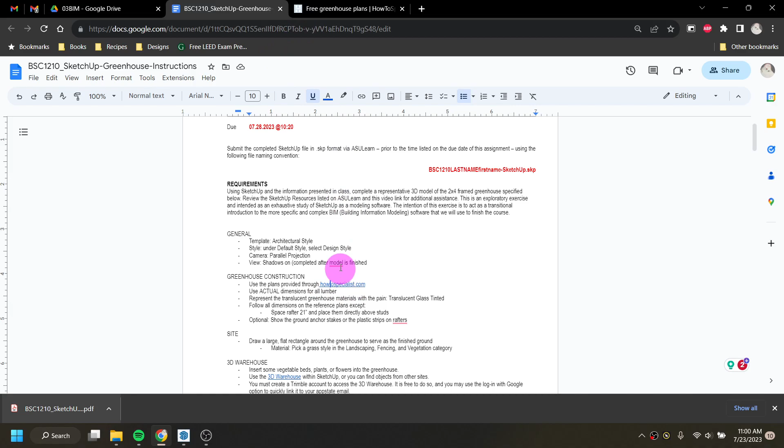Okay, this video is going to go over the SketchUp Greenhouse assignment. Looking at the instructions, we are going to create a greenhouse primarily from the plans that have been provided at howtospecialist.com. Please make sure you click on that link and look at these plans. We are going to tweak them a little bit for our own SketchUp design, but we're going to primarily use what has already been given here.

A little note too is that we are going to use actual sizes instead of nominal sizes. So keep in mind whenever we see something like a 4x4, it's actually going to be 3.5 by 3.5. And when we see a 2x4, it's actually going to be 1.5 by 3.5.

This is basically what our building is going to look like, and there are also some screenshots provided in the instruction file itself for what it's going to look like. We'll start off with building our base here, which is going to be 10 foot by 14 foot. These anchor stakes are going to be optional extra credit, but I will show you how to do them later on in the video.

We aren't going to go into as much detail as what's being shown through all of the joinery details, because in my opinion, SketchUp is much more of a conceptual software to get ideas across, and then we can bring it into AutoCAD or Revit for a lot more of those details.

So when we are in SketchUp, we want to make sure that we are using the architectural template, which is the one that's in feet and inches. Mine's the first in my list because I have it favorited. Yours might not be the first one in there.

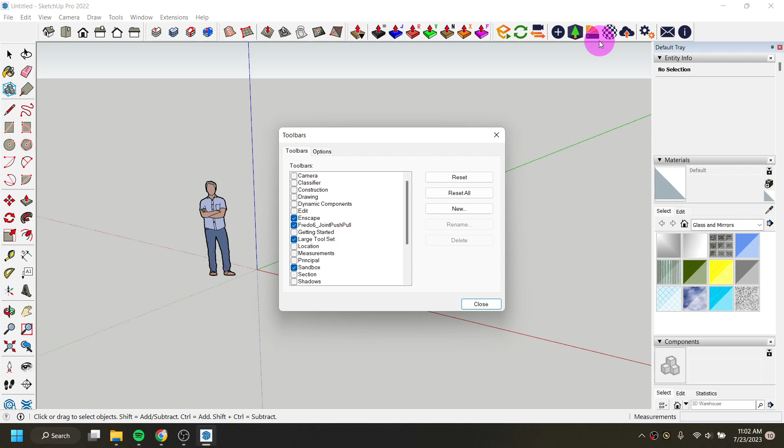Next, what we also want to change is our camera. I'm going to adjust the camera from a perspective style to a parallel projection, which is going to make it a little easier when I switch my views to look at something from the side or from the top, because it gets rid of all of that projection. Then I'm going to delete this guy here because he's just going to get in my way a little bit while I'm drawing.

So I'm just going to click on him and then hit the delete key on my keyboard to erase him.

As a little bit of a review from class, to move around in SketchUp, you can use your scroll wheel to zoom in and out. If you click it like a button, it will turn into the orbit tool and you can move around three-dimensionally. Then if you hold shift and scroll wheel down, you can pan the drawing around to move. So it's the opposite of Revit and the opposite of AutoCAD when it comes to those controls.

So the first thing I'm going to do in order to draw my object is just draw a rectangle for that 10 foot by 14 foot base. When we start typing in measurements, they are just going to feed into here automatically, so we will be able to see them. It's always a good idea too to start your drawing based off of this origin point, so that way we know if we're drawing something straight up, flat on our depth axis, our width axis, or our height axis.

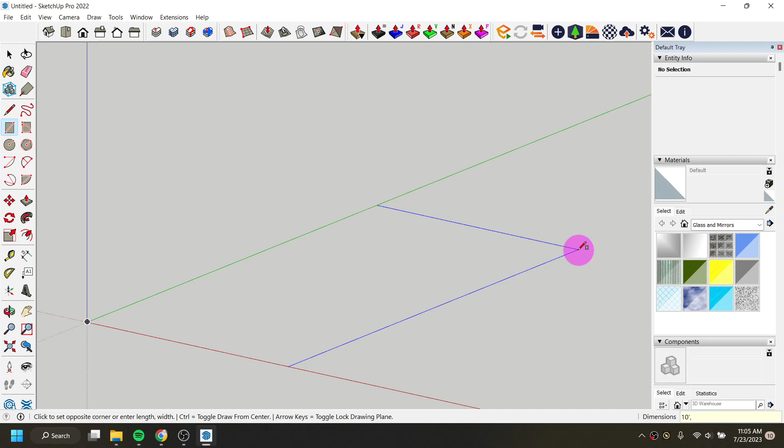So I'm going to draw a rectangle, which is keyboard shortcut R, or this button here in our tool set. I'm just going to start it on that origin point, and pull in a direction, making sure the rectangle stays blue when I pull it. Then I'm going to type in my distance, which is going to be 10 foot, comma, 14 foot, enter. And that will make my 10 foot by 14 foot rectangle.

What I'm going to do next then is pull this in for the measurement of the 4x4 that is making up this base.

I'm going to use the offset tool for that. So I'll hit space to go back into my selection tool, then offset is either keyboard shortcut F or this button right here. I'm just going to click on this rectangle, bring my cursor in, and type in my amount.

When I type it, I can do 3.5, or I could do 3 space 1/2. I don't have to put that quotation mark there for the inches. What I can't do is a 3-1/2, because it's actually reading that as 3 minus a half. I usually do decimals, so I'm just going to do 3.5, enter.

That has brought that in 3.5. I'll hit space to exit the tool. I'm just going to pan over by holding shift and scrolling my scroll wheel. I'm going to take this inner rectangle and delete it because I don't need that anymore.

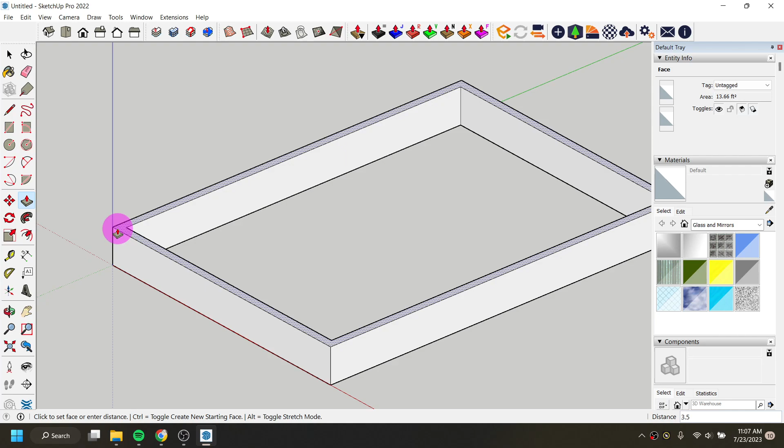My next step is to push-pull this base up. I'll use my push-pull tool, keyboard shortcut P, or this button here. I'm just going to click on that base face and bring it up 3.5. It's similar to AutoCAD: we click on what we want, move our cursor in the direction we want to go, type the distance we want, and then enter.

So I've made that base part. Now before I start putting in my studs and things like that, I'm actually going to group this into one solid piece, so it doesn't get changed or altered as I build other features on it. I'll hit the space bar to end the push-pull tool.

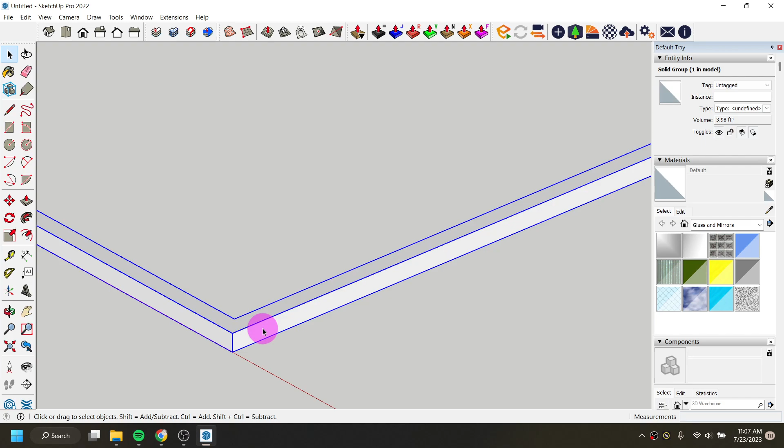I'm just going to click off to the side and do a big window selection of my whole piece, clicking and dragging - you have to drag it, you can't just release. Then I'll right click on the object and say to make this into a group. Now it no longer has any of those dotted surfaces on any of the faces, because those are no longer faces - they are part of this group, and the same with those edges.

If I wanted to edit any part of it, I just double click on it, and then I'll be allowed to edit things like edges and faces and move it around. Then I'd just double click off of it to stop editing it. I super recommend grouping everything as you make each solid piece, so you don't accidentally move or mess things up in the future.

Next we will just paint this into a different color. I find painting things as I work a helpful technique to understand what is one piece versus what is another. To use the paint bucket tool, it's keyboard shortcut B or this button right here.

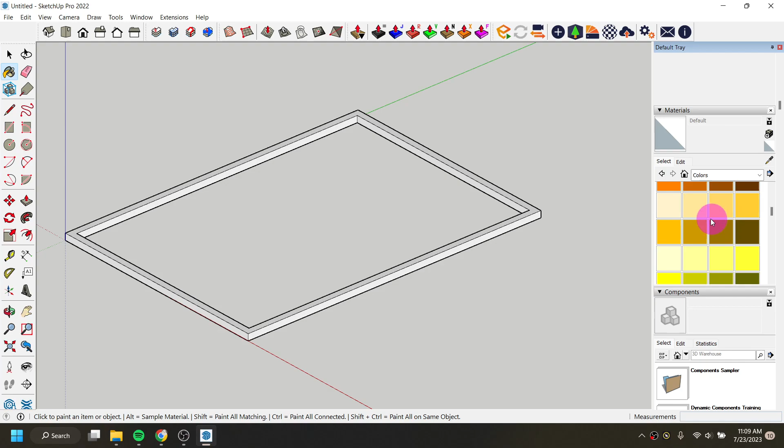When you go into paint bucket, your tray should pop up with your different materials. I'm currently in the glass material category because that was the last one I used when I last opened SketchUp. But I'm just going to go into the colors and pick a darker shade of brown for this, and a lighter shade of brown for my framing. I'm not going to be too specific - I'll pick this one, and then I just need to click on the object I want to color.

Because this is all one group, every piece of it colors automatically, which is great - that's what I want in this scenario. If I wanted individual faces colored, I'd have to hit space to get out of this tool, double click on it to get that highlighted box, then go back into the paint bucket tool with keyboard shortcut B. I could pick a color and color individual faces instead of the whole group at once. Not what I want to do here, but I just want to show you that it can potentially be done.

So I'll hit the space bar to get out of this tool, and I'll just double click off of the object to get out of it. So we have our base here. Again, we're going to ignore a little bit of these joins or joints going on here, and then we can get working on our walls.

One thing of note is that in these instructions, they have the rafters spaced 22.25 inches, but I found that 21 inches worked better to evenly space all of these around. So just keep that in mind as we work through it.

But we're just going to start with a wall that is 14 feet long and 6 foot tall. And that 6 foot is going from the stud only.

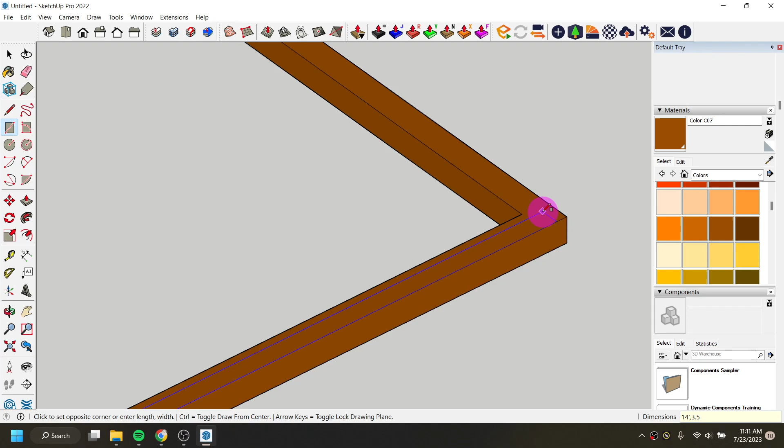So I'm going to go into the rectangle tool, which again is keyboard shortcut R, or this button here. I'm just going to start from this point. I'm going to zoom in, making sure that my rectangle stays blue, because that means I am flat on this face. And I'm going to make my length 14 feet, comma, 3.5. I don't need to put the inches, it's going to assume inches unless I say something else.

It's clipping a little bit into that base part because they are technically sharing the same spot. So then my next step is I'm going to push-pull this up 1.5. That's keyboard shortcut P, or this button here. I'm going to click on this face and pull it up 1.5, enter.

Now, before I start spacing out studs on here, I'm going to want to group it. So I'm going to hit the space bar, orbit myself around a little bit to get the best vantage point to select only this piece. I'm going to hold the scroll wheel to orbit.

And then I'm just going to draw a box kind of this size here. I don't want to go too large because I don't want to select any of this. And I also don't want to go right to left because this is going to give me a cross selection, which will select this. So I'm just drawing kind of a skinny box around here to only get that part.

Right click, make it into a group. I always want to group things as I'm working so that I don't accidentally edit them later on down the line if I don't intend to. And if I do intend to, I can always just double click on it.

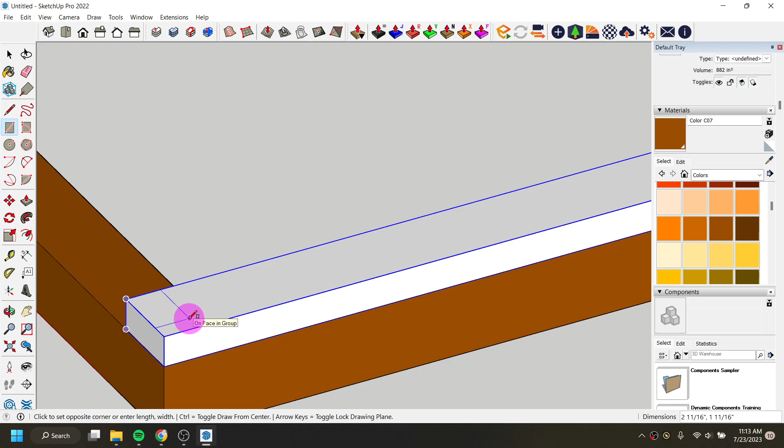So next, I'll start putting in my studs. I'm going to draw a new rectangle, which is keyboard shortcut R, or this button here. I'm going to keep it flat on this face, so again I want to make sure that I'm keeping that rectangle the color blue. And I want to make it 3.5, comma, 1.5, enter.

So this is going to be one of my 2x4s. I'm going to use the push-pull tool, keyboard shortcut P, or this button here. I'm going to pull this rectangle up, moving my cursor up, and then I'm going to type 6 foot, enter.

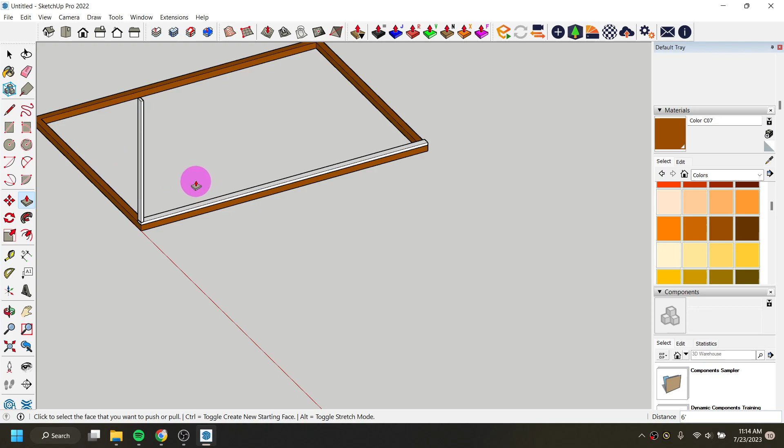And if you have been paying attention trying to guess what I'm going to say next, the next thing I'm going to do is group that. So I'm going to pan myself over, hold shift and the scroll wheel a little bit, and orbit myself to a vantage point where it will be easy to select just that piece.

I'm going to hit the space bar to get into the select tool, and I'm just going to draw a tiny box right over that stud. Then I'm going to right click, make it into a group, so that it will be a little bit easier to copy and paste along as I go.

So what I did before I placed any of my studs along this wall was I kind of spaced out some guides in order to do that, so I could make sure I'm going to have some even stud spacing happening here. Because this is a fairly small structure operating as a greenhouse, we can have our spacing a little bit wider. So I used my guide tool to help make sure everything was going to work out on this building.

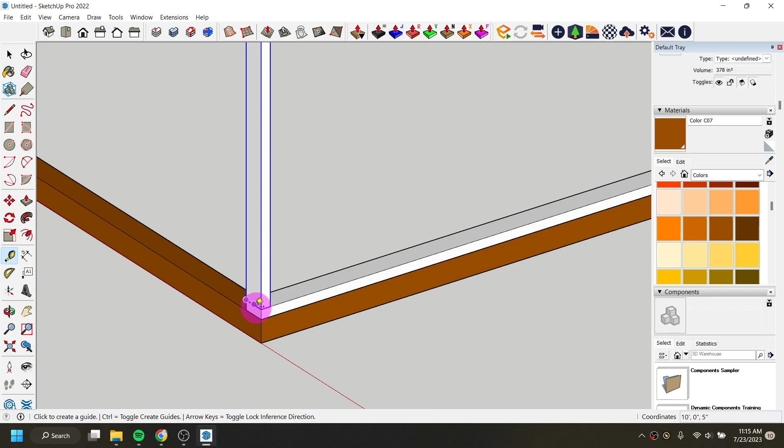So I used the tape measure tool, which is right here, or keyboard shortcut T, and I'm just going to draw a guide from this side. Let me space out and show again: I go into T, click on that edge, move my cursor towards the right, making sure that arrow coming off the guide is staying green. Then I do 21 inches, enter. This tells me where I can put the center of my next stud, so I go edge to middle.

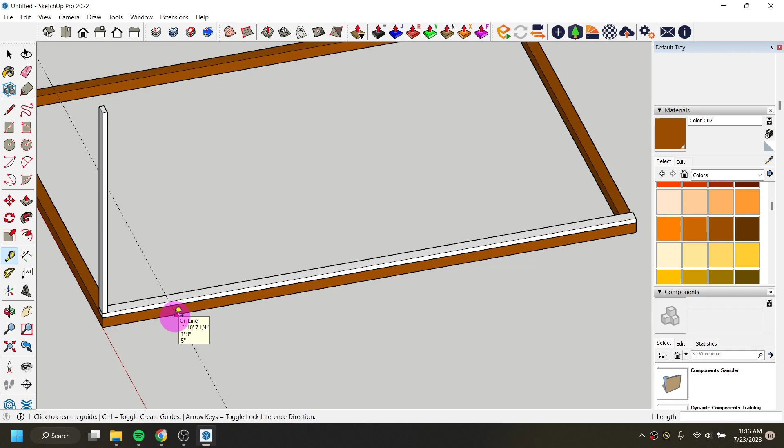I'm going to hold the shift key and scroll wheel down so I can pan over. Then from this guide, I click on this one over, making sure I'm getting that green line. Another 21. Click on this one, make sure I'm getting that green line. 21, enter. Always making sure whenever I'm using guides that it's staying a color.

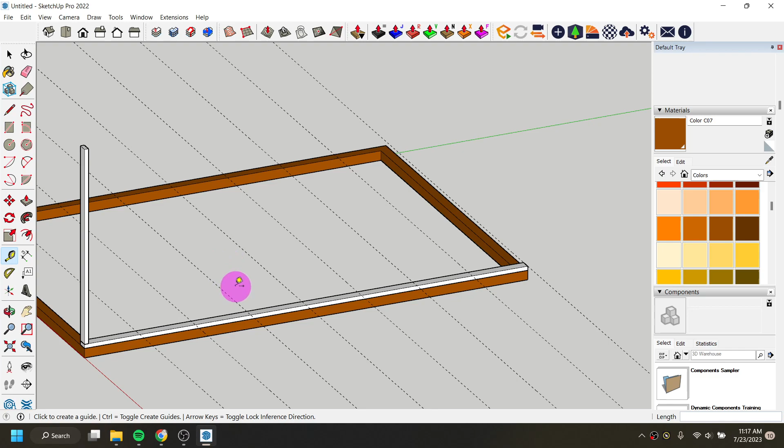So now that I have these as references for where to copy my different studs into, I'm going to hit the space bar to get out of the tape measure tool. I'm going to click on this stud group that I made and use my keyboard shortcuts to copy and paste it—Control C to copy after selecting it, then Control V to paste.

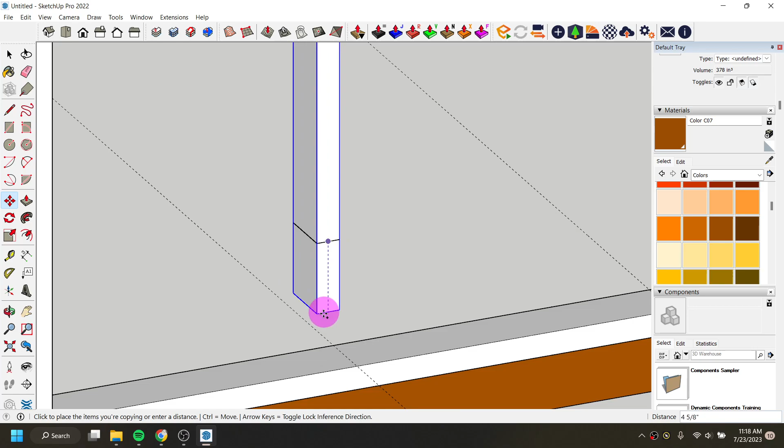I'm just going to put it somewhere, not trying to place it right on the money, just for now. When you copy and paste, it puts you automatically into the move tool, and this is where I can grab it by the middle of that stud and put it on the middle of where that guide sits. So I can paste again—since I've already copied this, I can just do Control V to paste, place it somewhere, then grab it by the point I want and put it on the point I want.

So I can keep just pasting them too. I've got another one—it looks like I might have pasted twice. I'm just going to grab it by, whoops, I'll hit the space bar, click on this one, go into Move, keyboard shortcut M, grab it by the middle of the group and place it onto that intersection.

And I'm just going to keep copying and pasting it all the way down. Control V to paste, place it here, grab it by that middle, put it on that point. Control V to paste, place it somewhere for the time being, grab it by that middle, put it on that point. Control V to paste, place it somewhere, grab it by that middle, place it onto that point. Control V to paste—hopefully you're getting the gist.

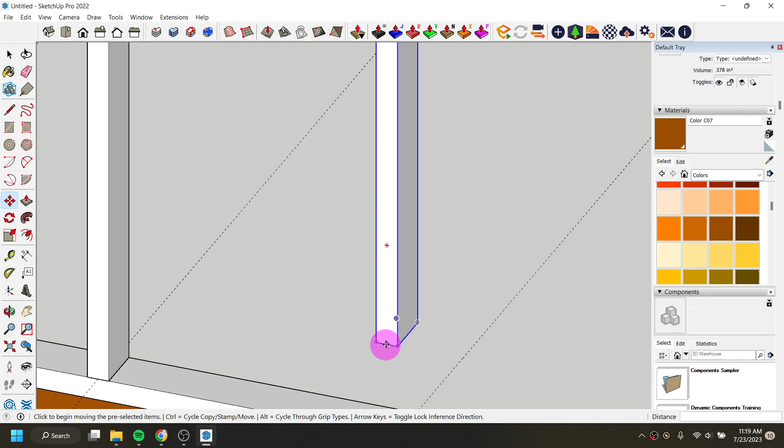And then this one, Control V to paste, place it. I'm going to grab it by this corner and put it on that point. And so now I have those studs placed evenly across this wall.

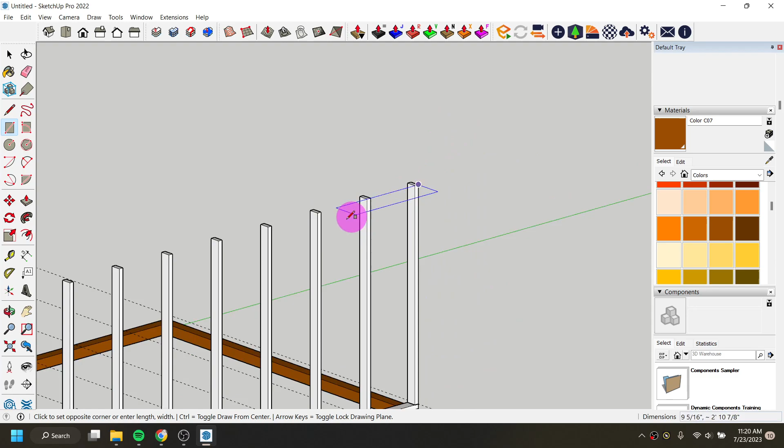My next step would be to make my top plate, which I could do in one of two ways. One would be, if I hit the space bar to exit this command, I could draw a rectangle using keyboard shortcut R, and draw one all the way across here. I'm going to hold Shift and the scroll wheel, making sure it's staying blue, and draw that across. Then P for push pull, grab this, bring it up 1.5, enter, space bar to end the tool.

And then group this into one piece. So again I've got to orbit myself around, holding the scroll wheel down like a button, so I can get some type of vantage point where I can grab just this guy. That's where I also need to make sure I'm going left to right. Right click, make it into a group.

Or what I could have also done, I'm going to click on this object and delete it. I could have taken this bottom plate that I already made, Control C to copy, Control V to paste, place it somewhere for the time being, and then grab it by a corner to put it onto that corner, because the bottom plate and the top plate in this scenario are exactly the same.

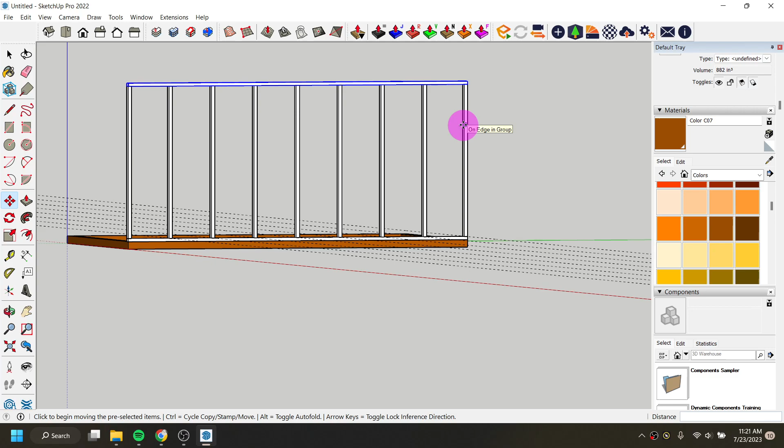Before I make this next wall, because this wall over here is going to be exactly the same, I'm actually going to take all of these separate groups and group them together into their own group to make it easy to copy that whole thing across.

I'm going to look at my object from one of the side views, right or left, to make it easier to face it head on. I'll hit the space bar to go into my select tool, and drag to only get my wall here, which I did. I'll orbit it around to check that, and then right click and say make a group. So I now have a group of all of my separate groups.

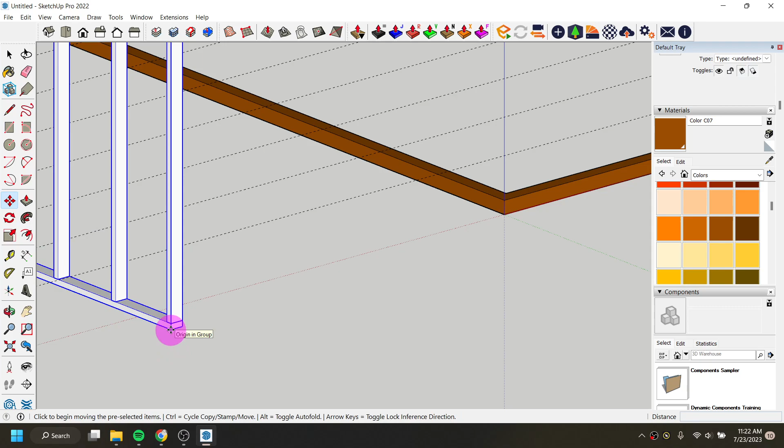I can take this, Control C to copy, Control V to paste, and place it somewhere for the time being. I'm going to hold my scroll wheel to orbit around, and while in the move tool, which copy paste tends to put you into automatically, I'm just going to grab it by this point and put it on that point. So now I just have 2 copies of this.

If I wanted to paint it, since it's all grouped, it'll be really easy. You don't actually have to go into the bucket tool to start painting. If I just click on a color, it'll put me in the paint tool automatically. Because all of these are grouped, I can paint them really, really fast. I'll hit the space bar to get out of the paint bucket tool.

My next recommendation would be to get rid of these guides. The more guides we have in our drawing, the more confusing things tend to get. They're really helpful while working with them, but once you're done, we want to get rid of them. You could click on each guide and use the delete key, or window around them and hit delete. Or you can go into the edit tab, where there's a delete guides tool that just gets rid of every single guide, each and every one.

Next, we will work on putting in our front pieces, our front and back pieces. They did them in a different color, but I'm going to keep mine in the same color. The only thing we have regarding the spacing of these is that there's going to be a 3-foot wide door in the middle of it.

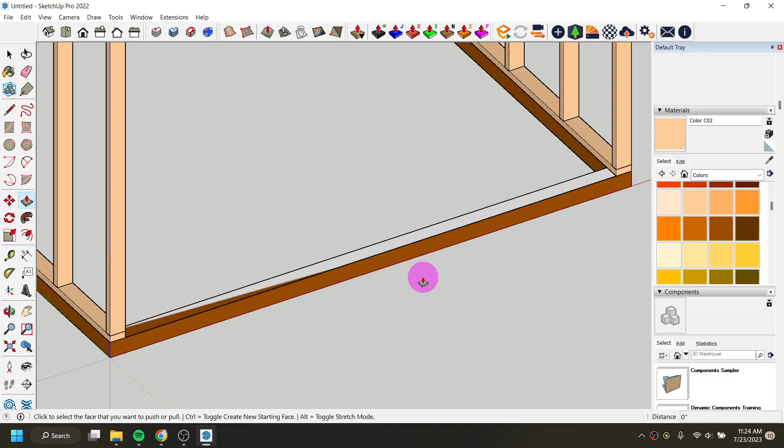Then I'm going to use push-pull, keyboard shortcut P, to bring this up. I could type in 1.5, or bring it up to the same point of this group here, since this is already 1.5, I don't have to take that measurement. And then, you guessed it, I'm going to group this. I'll hit the space bar, highlight a long, skinny rectangle to only get that piece, then right click and make it into a group.

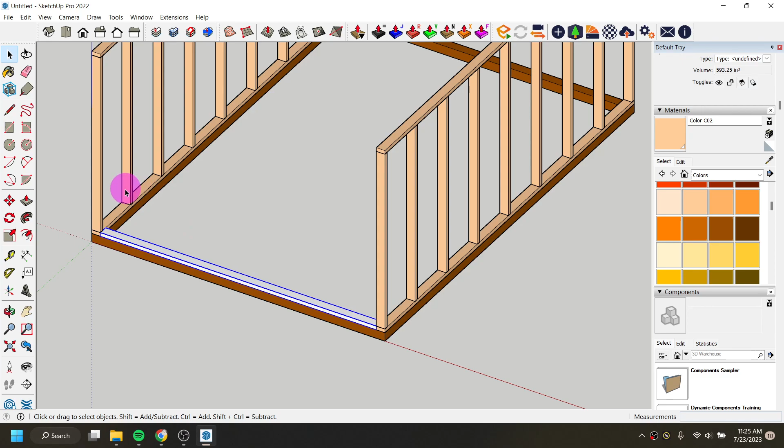I'm going to put a stud in here. I could do it where, but this seems like a little bit of an out of the way way to do this. I could double click on this wall, so now I'm in this group. I could click on this stud, Control C to copy, double click outside of this wall, Control V to paste it. I could then put it down.

I could use the rotate tool, located here—I don't know the keyboard shortcut for rotate, so sorry, it's not R. But I could click on it here, grab it by a point as long as this protractor is blue, go from the red axis, click again to the green axis, click again, and then move this into place.

That seems to me like a little bit of an out of the way of going about making that stud, because the way I would do it is go into the rectangle tool, keyboard shortcut R, from that corner, as long as my square or rectangle is blue. And sometimes I forget which number down here means what, so whenever I forget that, I usually just make a long skinny one.

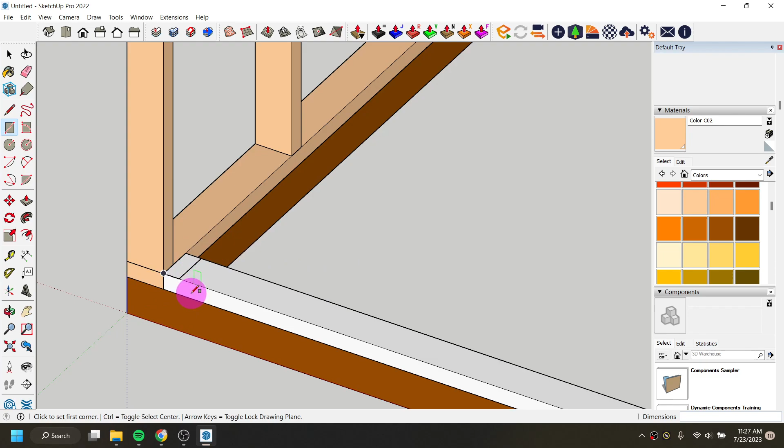When I make that long skinny rectangle, I can read those numbers to say okay, one of those is feet, one of those is inches. Now I know that the first number is my length or width, in this case right to left, and the second number is up and down. So I'll make it 1.5, comma 3.5, enter. Then I'm going to use the push-pull tool, keyboard shortcut P, to bring this up. I could type 6 foot, or I could click on that edge. And then you guessed it, I'm going to group it.

I'm going to orbit myself around, just holding the scroll wheel down, to get a vantage point that makes it easy to just get that piece. I'll hit the space bar to go into the select tool, then draw a click and drag a long skinny window around it to only get that piece. Right click on it and make it a group. You'll know if you accidentally group something else in it, so I'm going to Control Z to undo making it into a group.

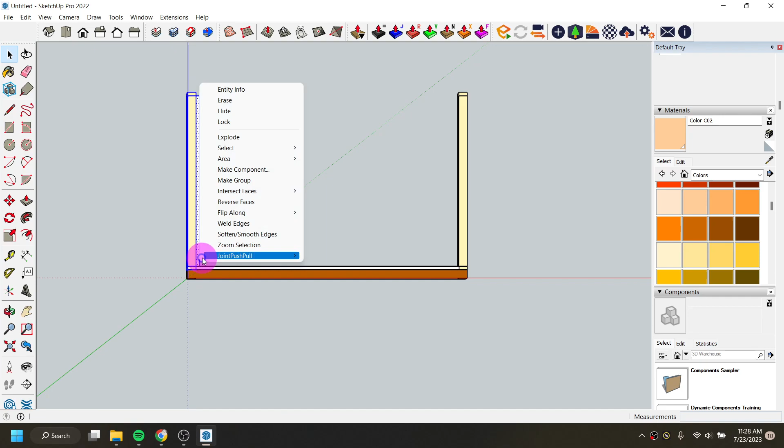If I try and let's say I get that part all in it, if I right click and make this into a group, see how that bounding box around it—when I go to click on here, everything else gets highlighted, or that box is much larger than I intend it to be. That's kind of my way of knowing I grouped something in there that I didn't want to. So I'm going to Control Z to undo that, and I'm going to redo it.

I could also look at it straight from the front to give me an easy vantage point, highlight just that piece, right click, make it a group. Then I'm going to Control C to copy, Control V to paste, place it somewhere, then grab it by a point you know of where you want that point to be.

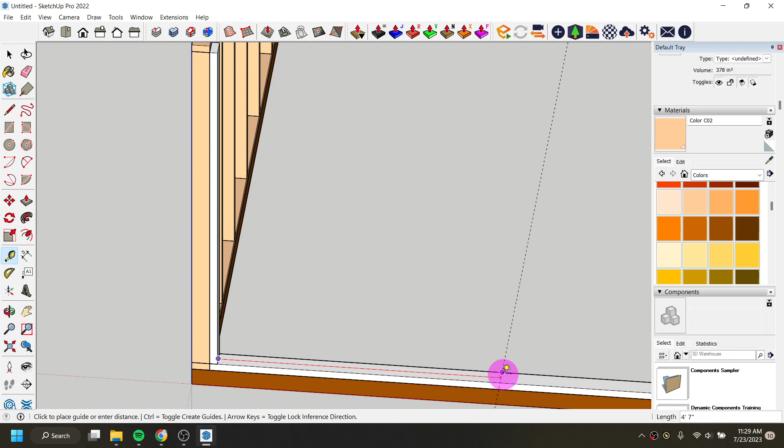I can also work in my opening here. Within my tape measure tool, I'm going to pull a guide over from one of those edges, making sure I'm getting a red arrow when I pull my guide out. I want to pull it until it reaches a midpoint, and it's going to snap when it's on that midpoint. So I'll click to place this guide, and now I know I'm in the middle.

Then I'm going to create a guide out from there—let's go back into tape measure, click on that line, making sure I'm getting that red arrow, knowing that I'm flat. I'm going to go 1.5 feet, or I could also type 1'6", or I could type 18, enter. Then from this way, still making sure I'm getting that red arrow, 1.5 feet. What that is going to do is tell me where the edges of these studs need to be on these sides of where my door is going to go.

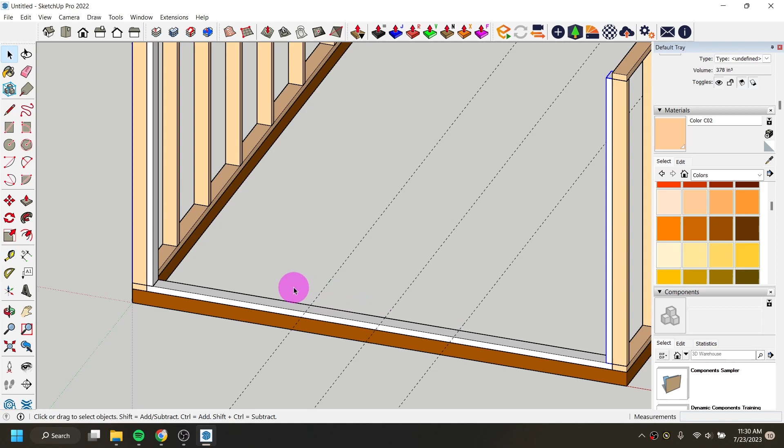I'll hit my space bar to get out of the guide tool. I'll Control V to paste—since the last thing I copied was this stud, I don't have to click on it and Control C again. Click somewhere to place it, then grab it by a point I know.

Of where I want that point to be. So I want that corner sitting there. Control V to paste, place it somewhere for the time being, grab it by a point I know of where I want that point to be.

And then I'll put in my top plate. So I'll hit the space bar. I'm going to just copy this bottom piece. So I'm going to click on it, Control C, Control V, place it somewhere for the time being, grab it by a point I know, and then where do I want that point to sit? Space bar to end the tool.

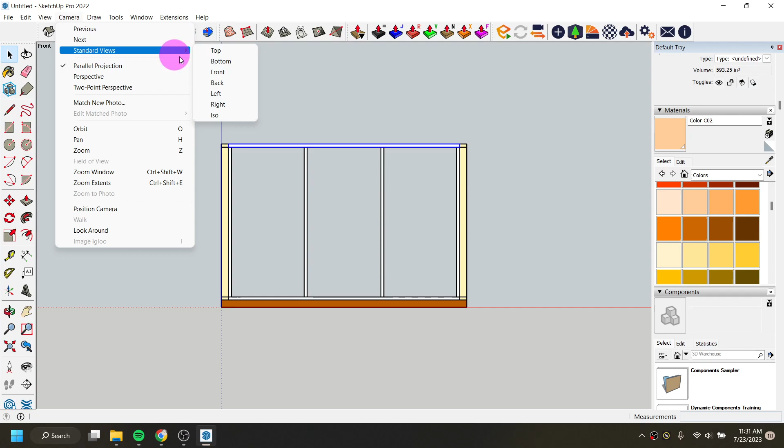And then I'm going to look at it from the front. So I'm just going to grab onto that front view. You can also get to these views without this menu up here. If you go into Camera, Standard Views, we have all of these ones here.

And then I'm going to use the Select tool. So I'll hit the space bar. And I'm just going to draw a pretty tight window around just those groups or just those components. So I'm just going to window around them, right click, make that into a group.

So I could easily Control C, Control V it onto the backside of this building. So I pasted it, just placed it somewhere. Now I'm going to grab it by that corner and put it on this corner.

And I need to paint it too. And I do kind of like painting things as I go. Sometimes I'll wait till the very end to do it. That can be kind of your personal preference.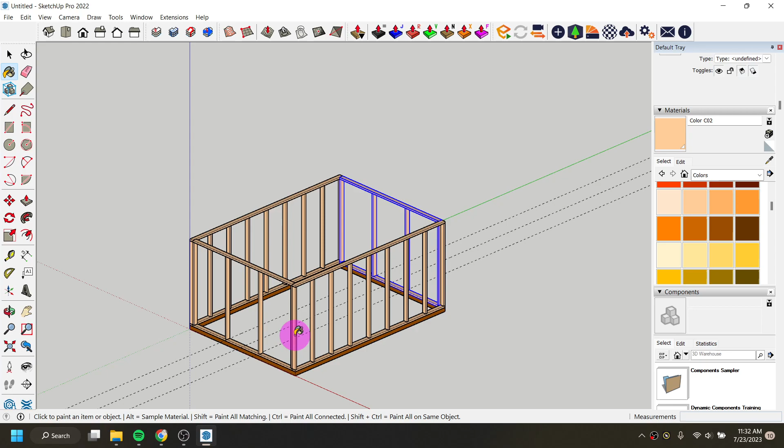And so we're going to ignore our kind of braces that are going on within here or within this particular drawing. Things too, like if you're going to have brackets, you can draw them in yourself manually, or you can use the 3D warehouse, which we're going to use to put in things like our awning windows, our door, as well as some plants and features in there.

And we'll get started on our roof. So within our roof, we have a few measurements that were given. So on the very longest edge here, we're at 87 1/4 inches. And then in this one here, from edge to where it meets here, we're at, let's see, 67 1/2.

But I actually am pretty sure from the first time I went around, all I really had to do was measure this one out. And then I just kind of put that one in wherever it fit or wherever it was placed. So I'm going to look at my drawing or my object straight from the front. And I'm going to use my tape measure tool to actually draw a guide at an angle.

So I'm going to go into my tape measure, which is right here, or keyboard shortcut T. I'm going to click on that point. And then, why isn't it letting me do an angle? It let me do an angle last time. Weird. Unless I want the protractor tool, which I sure do. So whoops, my bad on that one. So I'm going to go into protractor.

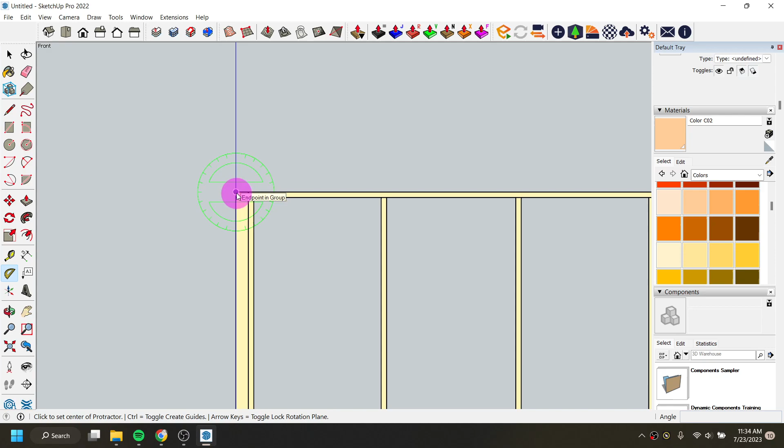My mistake. So I'm going to Control Z to undo. Click on that edge. Click here, and I want an angle of 30 degrees. And so this is essentially telling me where my first edge of this is sitting.

And what I can do instead of drawing that rectangle out and over is I can use the tape measure tool to make a guide from this line parallel down the 3 1/2, which I did 3.5.

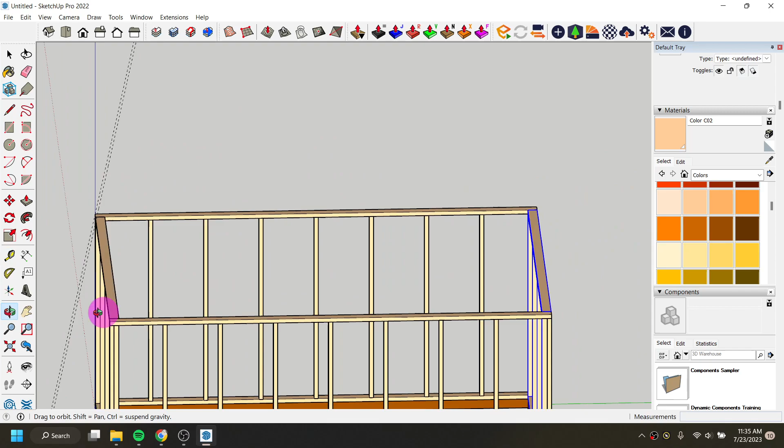So this is now just, I want to orbit to make sure I stayed flat, which I believe I did. It looks like I did. Okay, good. Good. And we'll look at it from the front.

I'm then, instead of going to draw a rectangle, I'm going to use the line tool, which is up here, or keyboard shortcut L. And I'm going to go from that endpoint, just following on this guide, that 87.25. And then I'm going to go straight down, straight over to where it intersects there, and then straight over here. So this is making this piece.

And let me go into the right software. Before I start putting in my other rafter over here, I'm going to use the push-pull tool. So I'm going to go keyboard shortcut P, and I'm going to bring this out. Let me orbit around a little bit. 1.5.

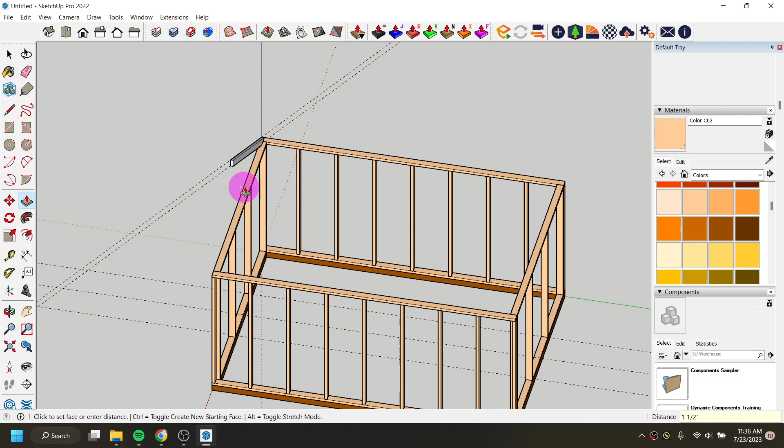And then I'm going to group that, so this way I don't accidentally mess it up. I'll hit space bar and draw a little square or rectangle around it. Right click, make group. It's going to be a much larger bounding box because this object is at that angle, but that's okay. We still have it how we want it to look.

Then I'm going to go to the front view and use my protractor tool again. I'll click on protractor, and while it's green, click on that endpoint, go straight out, click again, and then do an angle of 30.

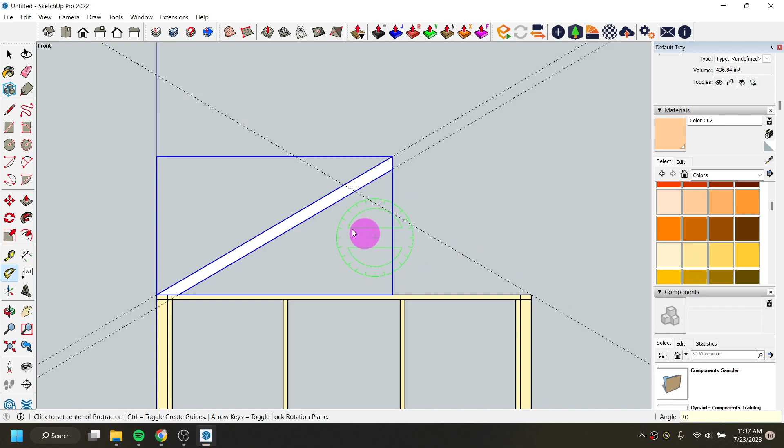And then I'm going to use my tape measure tool, keyboard shortcut T. Click on this line and bring it down. With this one, I didn't take any measurements, because all I'm going to do to make this rafter is draw a line from point 1 to point 2, 3, 4, and back to point 1. I've been able to figure out where that one's going to sit based on where this one is.

I'll use push-pull, keyboard shortcut P, to bring that out 1.5, and then I'm also going to group that one together so I don't accidentally mess anything up. This one's going to be a little harder to get just that group, so I'll hit the space bar and draw a rectangle, just getting only that bit, right-click on it, make a group.

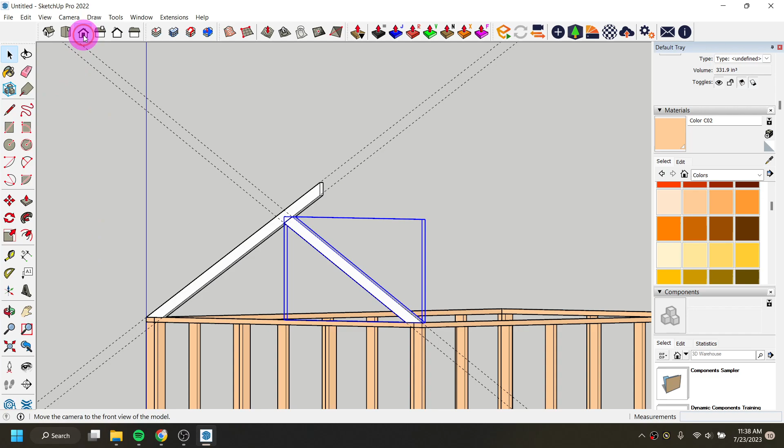Then I believe the last thing we're going to do for these rafters before we start copying and pasting them is put in this little spacer here. So it's just going straight down from there, 3.5 over, straight up. I didn't use as many measurements as they did because I can get those measurements on the computer. If I was going to physically build this, I'd probably need quite a few measurements, but the computer is going to help us quite a bit along the way.

So since these are two individual groups, I'm going to draw a line just from this corner straight down, and then use my tape measure tool to bring this straight over, making sure I'm getting that red, 3.5. And then I'm going to go back into the line tool. 1, 2, 3, 4.

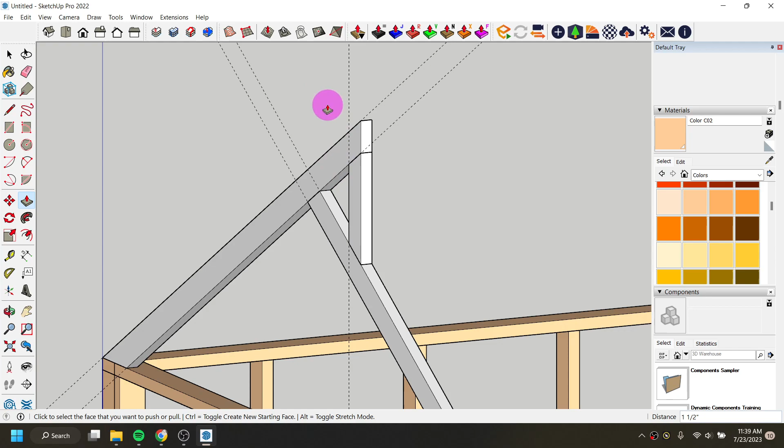And if you guessed it, I'm going to push-pull that out. Keyboard shortcut P, and bring it out 1.5. Or I could click on that group endpoint to just bring it out that exact amount of where I've already brought these ones. Hit the space bar, highlight it, right-click, make it a group. So everything, I always make groups as I'm working through it.

And then I no longer need these guides to finish up these rafters, so I'm going to edit, delete guides.

Before I start spacing out these rafters here, I'm going to make the rafters themselves into a group, all 3 of these together into a group, so that way I can just easily copy it along the way. And if I wanted to, it would be smart to go into the paint bucket tool and paint them beforehand, so when I copy and paste them, they already have that color applied. I've been doing it after the fact, but we can do it beforehand.

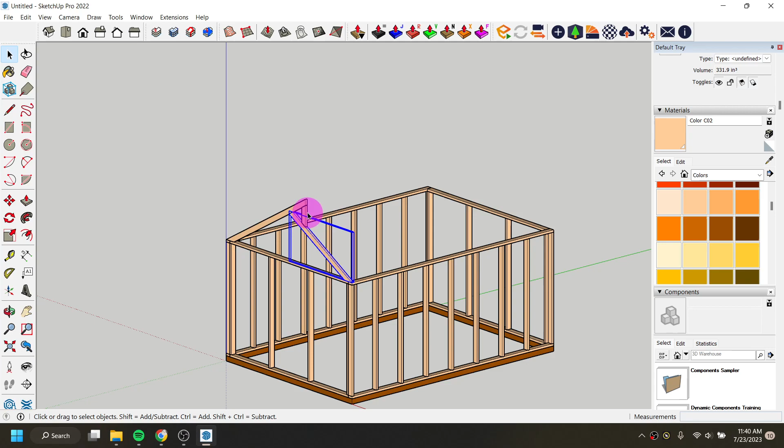So I'm going to make all 3 of these into one group. What I could do is window around all 3 of them real carefully. Because these are pretty big groups, as long as I'm going left to right, I can get a pretty big window and still only get those 3. Or I can click on this group, hold control, click on this group, still holding the control key, click on this group, right click, make a group, and now this whole rafter piece is one group.

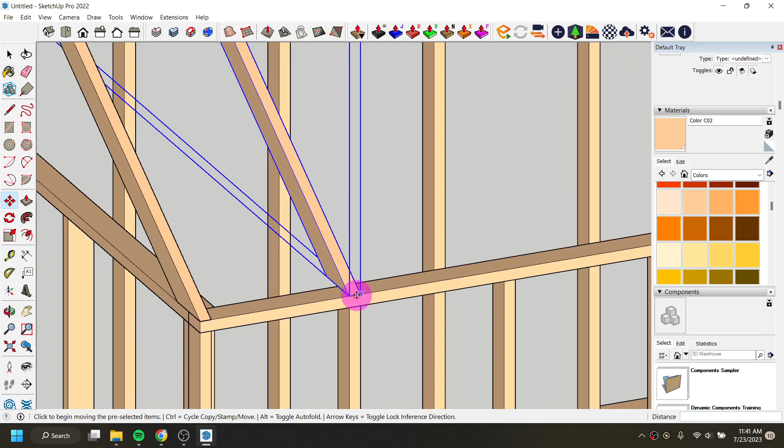And I can copy and paste it. So Control C to copy it, Control V to paste. I'm just going to place it somewhere. Then I'm going to grab it by a point I know. And where do I want that point to sit? What I'm doing here is hovering over that because I just want this rafter to sit right on top of where that one sits. Paste, place it, grab it by a point.

But sometimes it can be a little tricky to do this. Hover over it—it doesn't seem to want to actually... there we go.

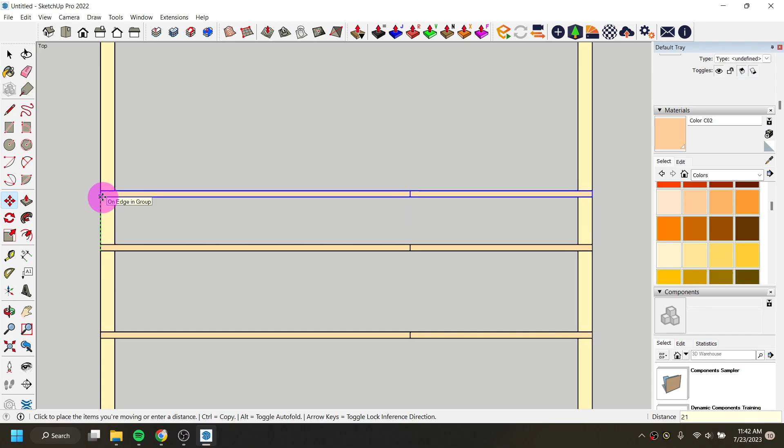Another way I could approach it too is, since I know that this spacing from here to here is going to be 21 inches, I could look at it directly from the top and do Control V to paste. I can put this right on top of its existing one, and then in the move tool, move it. As long as I'm highlighting that green edge, I can say I want to move it 21 over, and it just made it 21 inches over. Control V to paste, put it directly on top of the existing one, then click on it, move it 21 over. So that's another way I could do this with my rafter spacing.

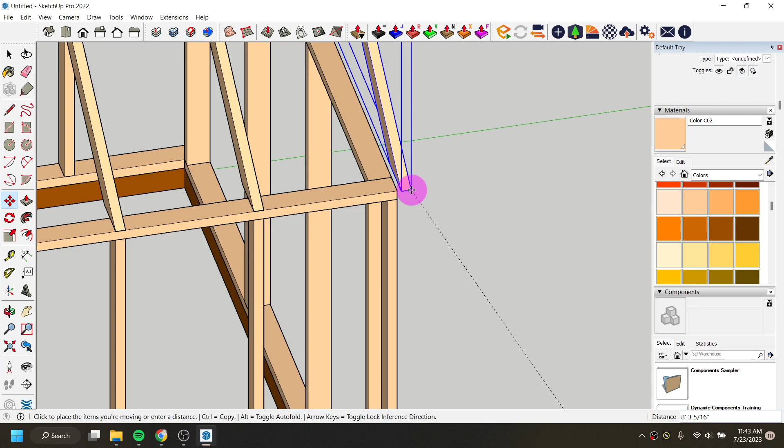Since sometimes it can get a little picky about picking it up at a point and hovering over to track where it would meet, that's a similar feature like AutoCAD. Paste, place it somewhere, click on the endpoint, hover over, click where that would meet, paste, place it somewhere, using Control V to paste. Hover over that endpoint, move it up to see where it would meet, Control V to paste it, and this time I'm going to click on this edge and put it right on that corner. So now I have the rafters ready to go and done, and I'm ready to start adding in some of my features for my little windows and pieces up here.

Next up with our rafters, as we've already got our spacing here for the frame, we have some 2x2s that we're going to put in at the top and bottom. One thing of note is I am going to group them and copy and paste them along, but because from our first stud, going across from face to middle is 21, and it's 21 from here to here, the one that fits within here is just going to be slightly smaller. So we're just going to have to make a little bit of an adjustment as we go.

So I'm going to put my first 2x2 in. I'm going to orbit myself around to just look at this one here, and I'm going to draw a rectangle from this corner. As long as it's staying that green color, that means I'm good. I'm going to do 1.5, comma, 1.5. I'm going to use the push-pull tool, which is here, keyboard shortcut P, to bring this to this face right here, and just click to end it.

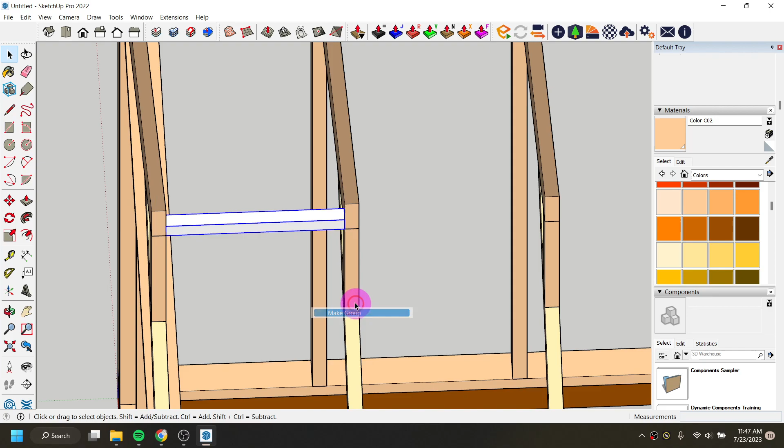I'm going to make it into a group, so I'll hit the space bar to get out of the rectangle tool, click and drag, right click, make a group. Then I'm going to copy and paste it to sit also down here. Let me just make sure I'm putting them in the same spot that they're going to have theirs put in. Okay, I know where they're putting theirs. So I'm going to click on this group, Control C to copy, Control V to paste, place it somewhere, grab it by this corner, place it then on that corner. That's where the start of kind of my window frame is going to go.

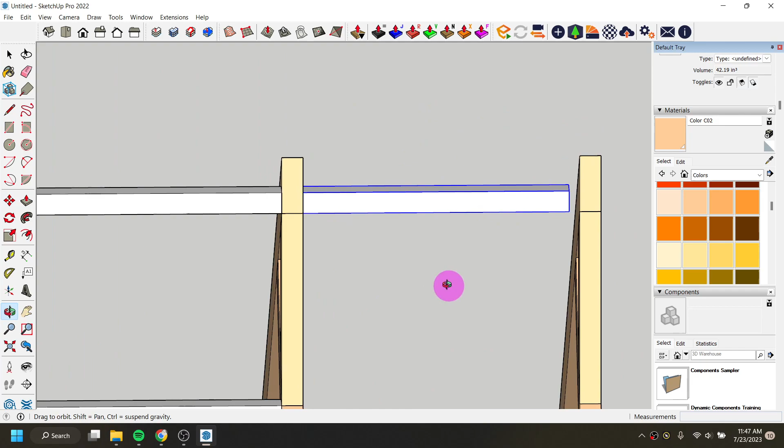The issue is when I go to paste this up here, of kind of what I described - I'm going to grab it by that bottom corner onto here, and see how it's too short now? Easy fix: I'm going to hit the space bar to get out of the move tool, double click on this object or group, and now it has that box around it. I'm going to go into the push pull tool, keyboard shortcut P, or this button, and just bring that face out to here, so I can just edit this one and it's going to make no changes to this one at all. Then I'll hit the space bar to get out of push pull and double click off the object to exit it.

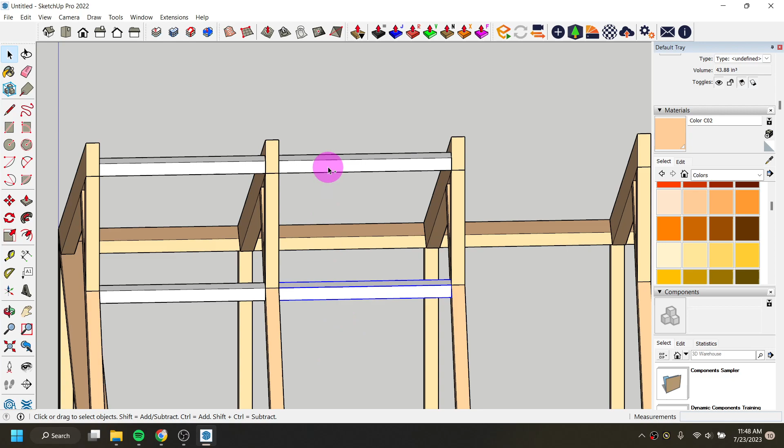And I will take this one, Control C to copy, Control V to paste. I'll place it somewhere, which I placed it very far away. I'm going to grab it by that corner, orbit and pan my way over and put it here. I can also, with these window frames, select both of them - I'm going to select this one and then hit Control and select this one, and then right click and group those two groups together so I can copy and paste them as kind of one part.

See, sometimes you think you're pasting something close and then it's a surprise, you're not. I'm going to grab it by that corner to put it on that corner. Paste. Grab it by this bottom corner, put it here. Paste.

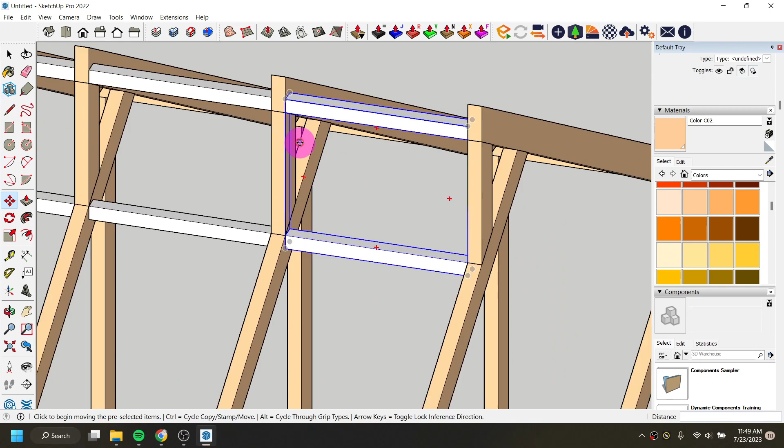And just like with a lot of the software that we cover in this course, my way is not necessarily the only way to do this. You could draw each one of these pieces out. You could do a bunch of different things.

For this last one, I am going to copy and paste my first one since this one's a little bit smaller. So I'm going to take both of these. I clicked on one, held Control and clicked on the other, Control C to copy, Control V to paste. Even though these aren't grouped, they'll still move together because they were both selected at the same time.

And then I have those window frames started in for here. And I believe my next step is I'm going to put in windows and doors. Yes, so within some of the windows and doors in the instructions, they are going to go over how to actually create them and build them out yourselves. And you could do that for the door and for the window. But what I really want to make sure that we have a good understanding of in particular with this software is a feature called the 3D warehouse.

So within the 3D warehouse, you can get to it in the quick or in the large tool set. It's kind of located down here a bit, or you could go into the window tool 3D warehouse and that will open it. You do need to make an account with SketchUp in order to use the 3D warehouse, so you do have to have a Trimble account. It's completely free and there is a sign in with Google option, but within here, this is kind of like how CAD blocks function, where we can find different things that either other people have made or other manufacturers have made and put up here for us to use.

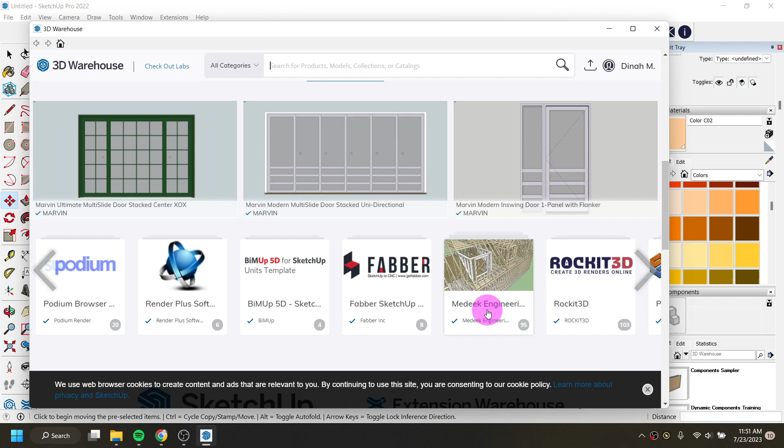Kind of want to look at that later. I was just like, ooh, that framing extension looks cool.

But what I'm going to do is I'm going to search up at the top for an awning window. By default now, it's going to put me into products, which again, these are coming from manufacturers. If I want to look at models that other people have made, I can also just go into models.

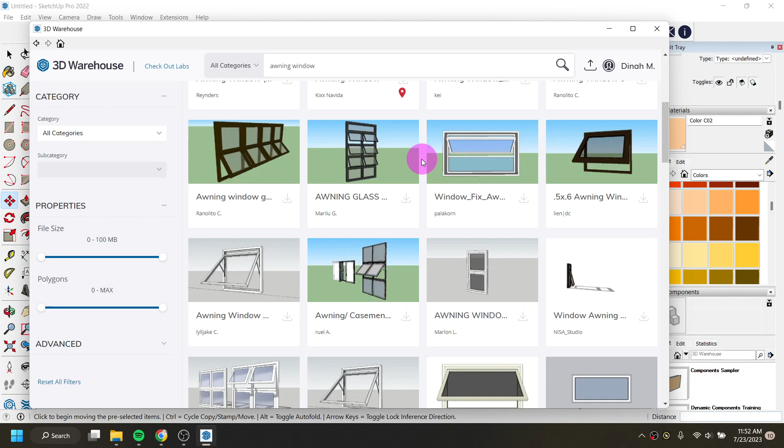I usually prefer models because I get a little bit more simplistic looking stuff. You want to be a little wary about putting things that are too detailed into your projects, because then they start to make your work look a little worse if all of these other details added to it are just super duper, almost way too nice.

I believe these were the ones that I used in the first one I did as practice, so I'm going to just download this. And do I want to load it directly into my model? Yes, I do. And it's just going to allow me to place it somewhere.

And this is one of those scenarios where I'm going to click somewhere to place it, and then I'm going to grab it by a point I know, of where do I want that point to sit. So I'm just going to put it right into that corner. One thing you probably notice about this awning window is it's much too large to fit into the opening we have, so we are going to use the scale tool to fix that.

So while I still have the object selected, I use keyboard shortcut S or this button right here. And when I go to scale it, I'm going to grab it by this middle diagonal and move it into the group that I want it to be. So I can do a scale by the middle top to make something shorter or taller, or I can do it based on a middle side to make it smaller this way. I like the middle diagonal because I can easily just kind of snap it into another point.

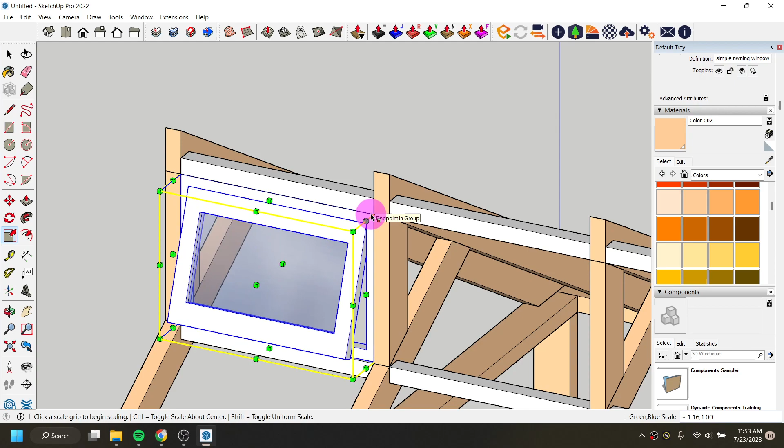And I can do Control C, Control V to copy this new size one. I'm going to grab it by this corner and just pan over. So I'm holding Shift and the scroll wheel to put that one in here, because remember, these two are just going to be slightly smaller.

Then I'm going to paste this window again, but I'm going to grab it by this corner and put it here. And this one I'm going to need to scale to a different size because it's going to be too skinny for this particular window.

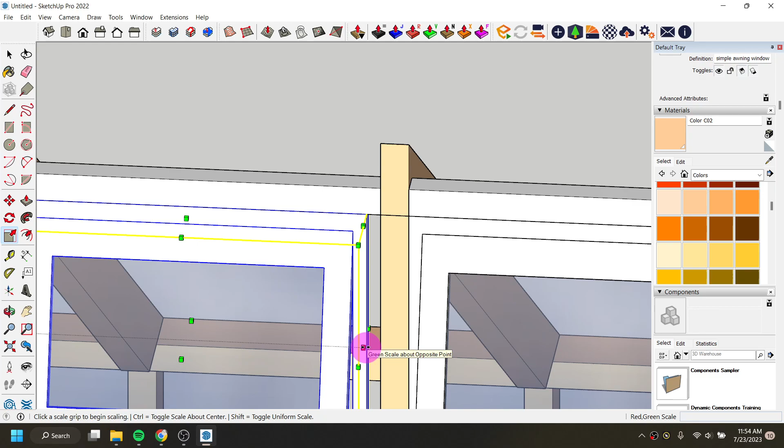So while I have the window selected, I'm going to use S for the scale tool. And this one I could do just based off of this middle and just grab it to where it's on that edge, since my height isn't changing, just my width. Or I could have done it by the diagonal as well.

I'm going to copy paste, place it somewhere, grab it by a point I know. Where do I want that point to sit? Control V to paste, place it somewhere, grab it by a point I know. Where do I want that point to sit? Paste.

Maybe you're catching on that I'm often grabbing it by a point I know and placing it where I want that point to be. Occasionally I do have to reset my view or orbit around a bit to really get it into a particular point.

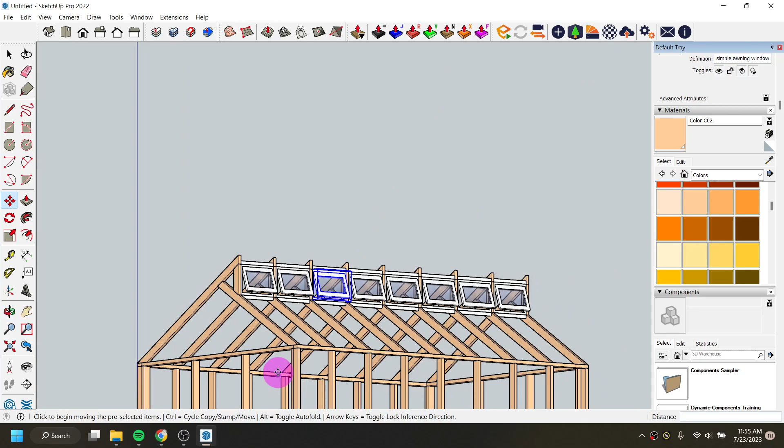And then I have these windows detailed in up here. I'm going to do the same thing with the door.

I'm going to find a door on the 3D warehouse instead of building my own, though I could absolutely build a door if I wanted to. To get into the 3D warehouse, it's either this button here or within the window tab.

I'm just going to search for screen door. If you're in products by default, these are usually going to be a little bit too much for what we need, especially in this project, so I'm going to go into the models.

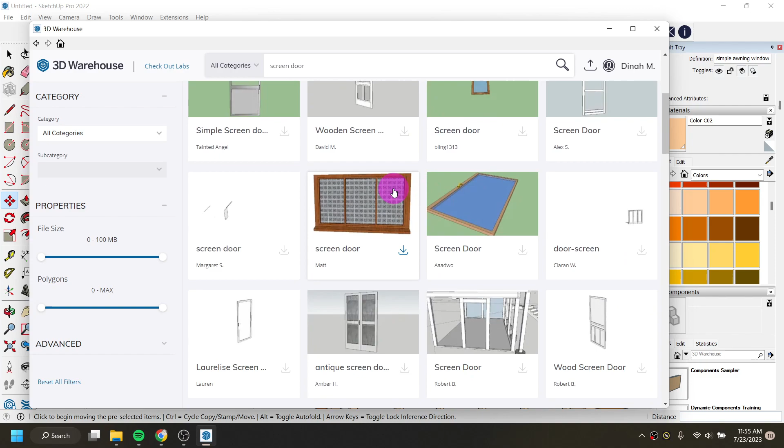I'm going to see if I can find the door I used in my first practice, so it's going to be the same door I choose again. I'm going to download it. You don't have to pick the ones that I use as well. I'm going to place it in my model just somewhere.

Grab it by a point I know, and where do I want that point to sit? In the case of this door, it is 3 foot wide, but it's a little bit too tall for what we're looking for.

So I'm going to go into the scale tool, which is here, or keyboard shortcut S. I'm going to zoom in so I can make sure I get it on that center, and I'm just going to pull it down until I'm on the edge of the group. Now the object is shorter.

One thing is the person who made this has this guide in here, which when I hit the space bar and click off of it, that guide is going to remain.

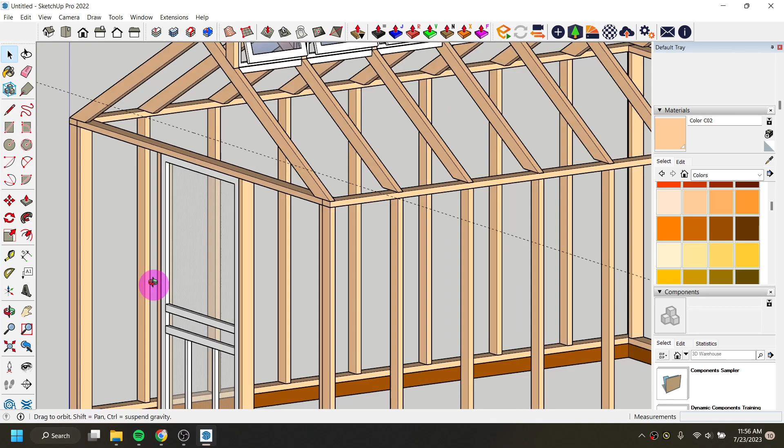Or is this door too wide? Actually, this door is a little bit too skinny, so we need to scale it in that direction too. So I'll do scale.

This one's going to be a little hard, but if I get in close, I can find that middle one, and I'm just going to do it to the edge of that group. Maybe didn't catch that the first time around.

But this guide issue here - if I hit space and double click on the door, now I can take this guide and delete it, getting rid of it. Would it have been the end of the world if it was there? No, but visually it was pretty annoying to look at.

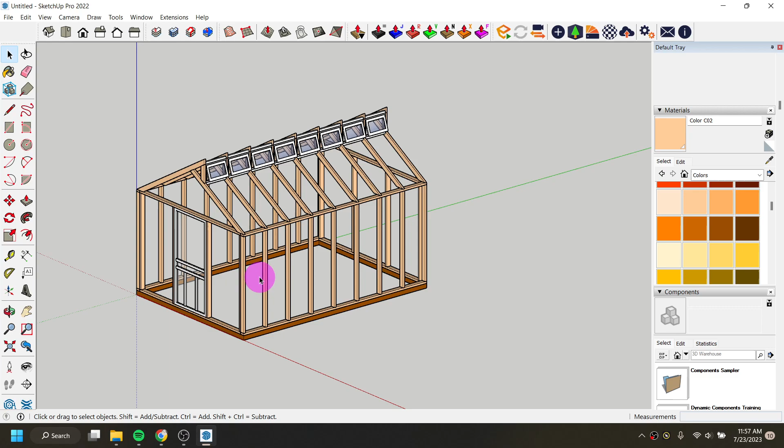My final step of completing the greenhouse itself would be to add in the glass, or rather it's actually going to be plastic on a greenhouse, but we're going to draw it as glass here on our walls. Because all of our walls and our door and windows are groups, we're able to just draw a singular face on top of them and then give it a paint of the glass.

To do that, I'm going to go into the rectangle tool, keyboard shortcut R, or this button here. I'm just going to draw a rectangle from one end to the other, making sure it's staying highlighted red - it's just a single face. We're not going to push pull it or anything.

Instead, I'm going to go into my paint, into the glass and mirrors section, and I used the translucent tinted glass to paint this face into my greenhouse.

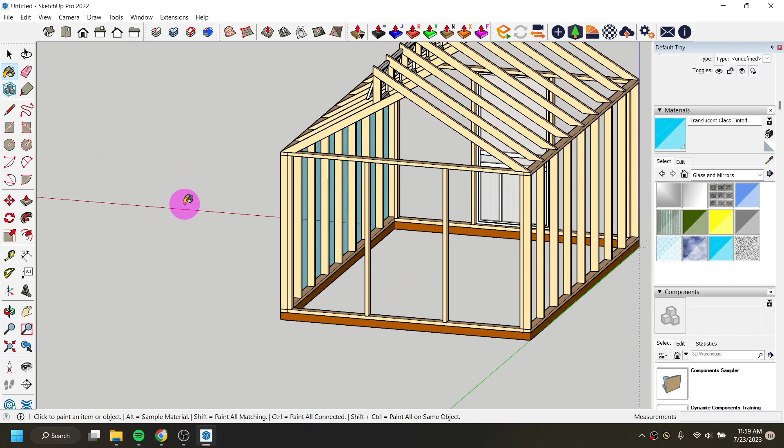We could do a couple of different colors. We probably don't want - all right, looks like I didn't pick it - we probably don't want this mirror one. I found this one looked the most greenhouse-lookingest, even though it's a piece of glass, not a translucent piece of plastic.

For my other walls, like this one, I did a rectangle from here to here, this time making sure it's staying this green color, placed my glass, and then did a separate rectangle for the roof. So I did a line, and a rectangle from one point to that area, placed a color, and I'll also have to do another one here.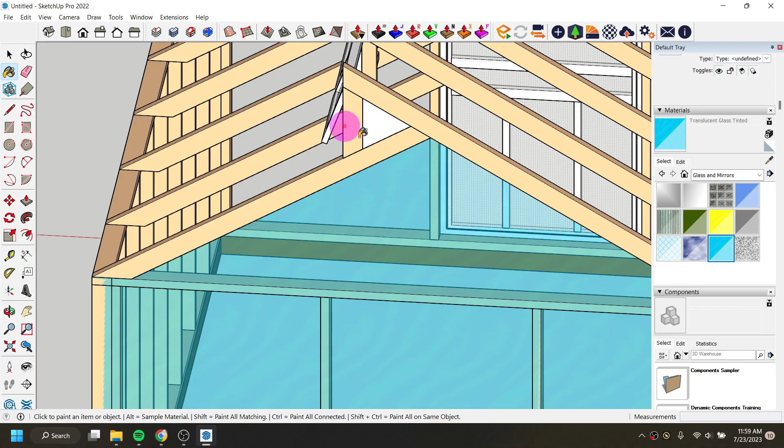Anywho, you guys probably just want me to finish, so I'll hush up soon, I promise. For my roofs, I started running into a little bit of a snag trying to get them nice and flat on each side.

So what I did for the roof was use the rectangle tool. I started in this corner, then went to this one, see how I'm staying green? But once I try to go down here, it won't give me that nice green rectangle. So instead I just brought it down to the middle, then hit the space bar.

I clicked on just this bottom edge, and used the move tool to move only the bottom edge straight down, flat onto the group, which it doesn't seem like I am doing. Maybe if I grab it by a midpoint.

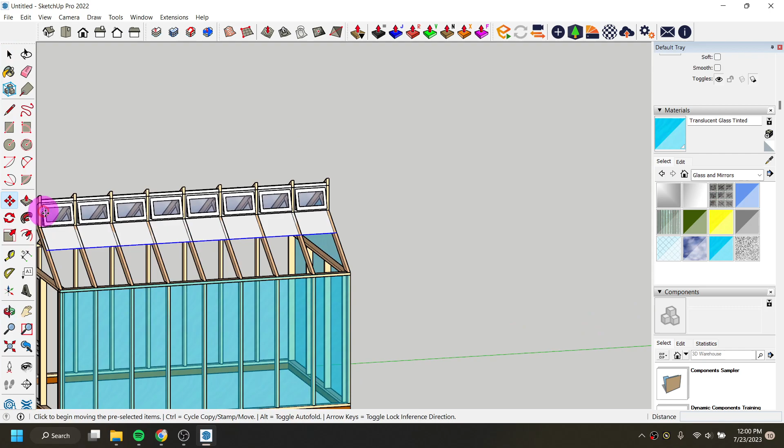Click on this edge, move. Where was the midpoint? It's probably right there. So if I bring it straight down, it stays completely flat on it. Then I can go into my paint and paint that.

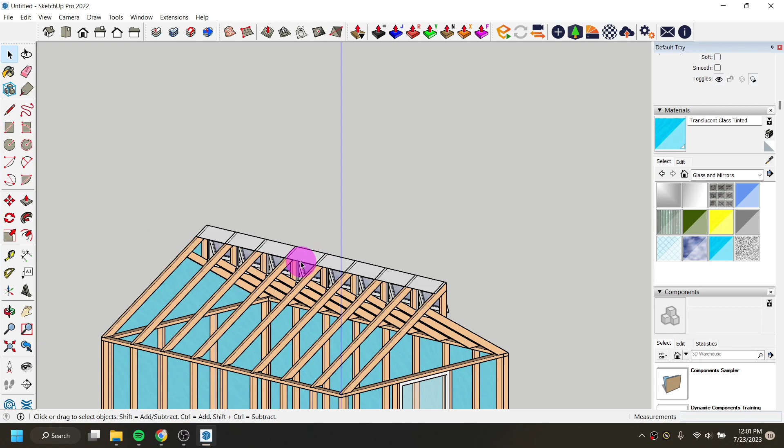I did the same thing here on this back edge, where I did a rectangle from this one corner, kept it green for as long as I could get it to remain green, but it kept wanting to snap to other points. Then I hit the space bar, clicked on this edge, M for move, grabbed it by its midpoint, which would probably be right here in the middle of that middle stud, or middle rafter.

Then I want to move it onto this midpoint, if it'll let me, because I want to keep moving it flat. See how sometimes it's now just getting all wonky, wavy. I might have to escape and go back into it. Well, I definitely didn't put that on the midpoint of that one. There we go.

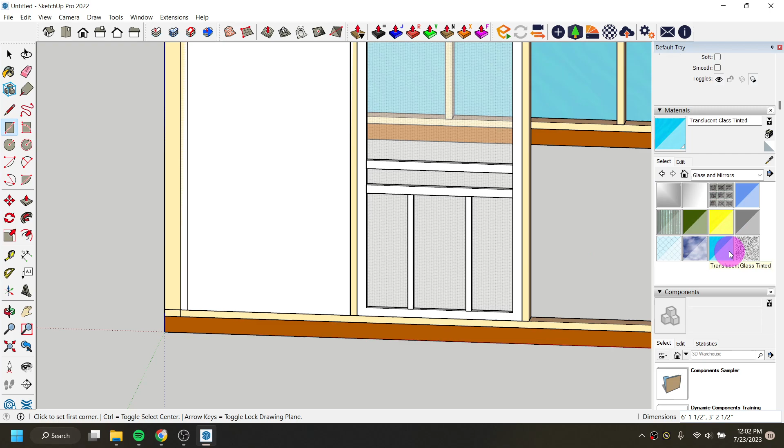And then paint. I'll do the same thing to this front. For these, I would do each one of these walls on each side of the door as its own rectangle, so that way I keep my door.

For one of the final steps, I'm not going to do each and every single one of those rectangles for the piece of glass because it is a little bit repetitive, and I want to keep the video as short as possible.

We need to add in some landscaping. So for that, our landscaping will be a big old rectangle. I'll go into my rectangle tool, from here to here, looks beautiful.

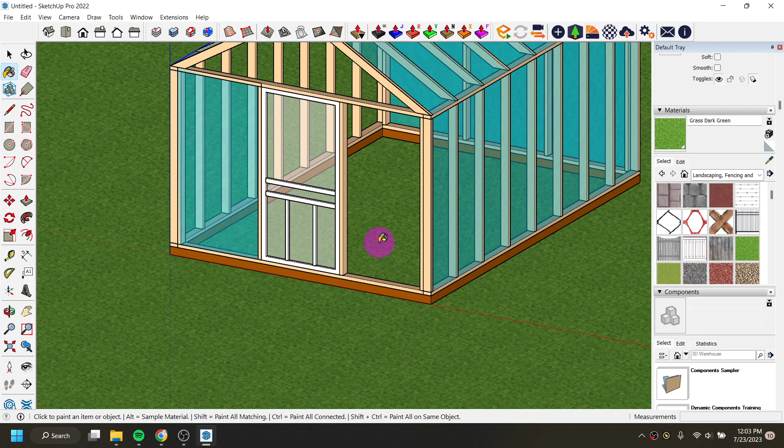And then for my materials, you'll choose one of those grasses. Additionally, you've been asked to put in some plants or different features that would go inside of the greenhouse, which can be found in the 3D warehouse.

If I search for something like vegetable beds. Huh, really?

There's a couple, there's these pallet planters. Did I spell vegetable wrong or something? I don't think so. I did. Maybe that's why I couldn't find vegetables, because I spelled it wrong. Wow, look at me go.

Here we go, I was just surprised that there were no vegetable beds at all. If I wanted to put this in, I can download it, load it into my model. I'll give it a second to load because it might be that it's not complex, but maybe a little detailed.

It's not responding, but I'm going to wait, I'm going to be patient. Maybe not, maybe I just crashed it. What a wonderful way to end it.

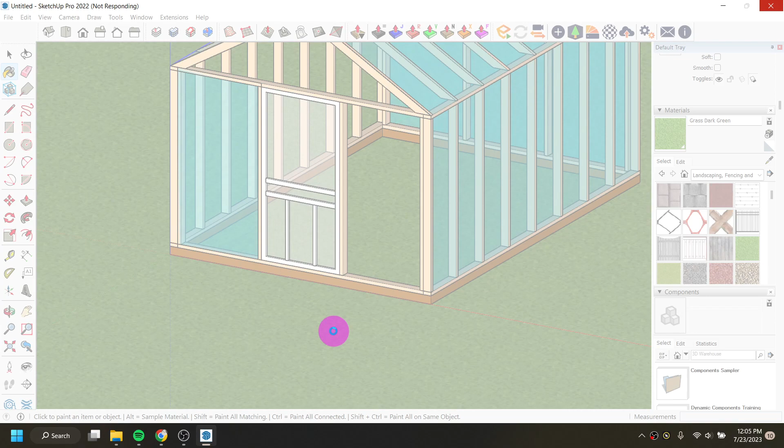But I would want to load some of those in, and it looks like I'm not going to be able to load this one in because this model is going to crash it, which is a bit of a bummer because I also didn't save my work at all while I was working.

So here we go, see, it didn't, I just had to be a little patient. I'm going to place it over here and then I can grab it by a point to put it on a point within my garden, within my piece.

One thing with yours, which, whoops, see, look at where my land is too. Sometimes when we orbit around, we find a lot of real wonderful things, so I'm actually going to delete my piece of land for a second. Whoa, I'll do my land last.

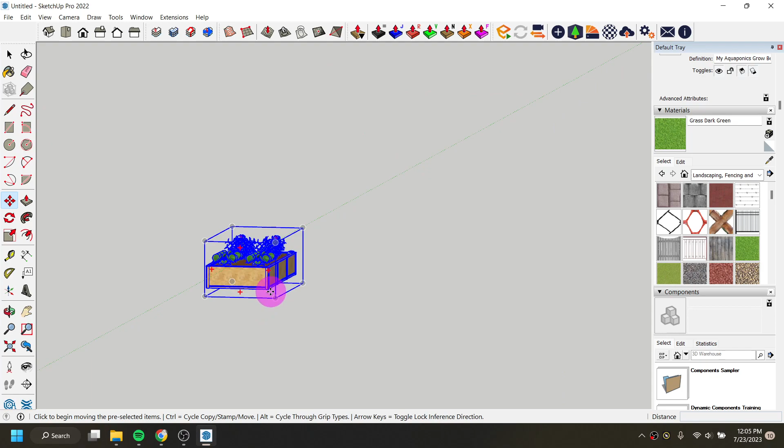But sometimes when we want to put things inside of buildings or objects, we have a really hard time trying to move this into place where it's sitting nice and flat and flush. So what I recommend doing is first looking at your object from the front, so that way we can at least line up where the bottom of this bed is with where my floor sits.

So I'm just aligning it to that floor. And then I'm actually going to use a tool called the section cut, where I can slice my building open and get rid of my roof.

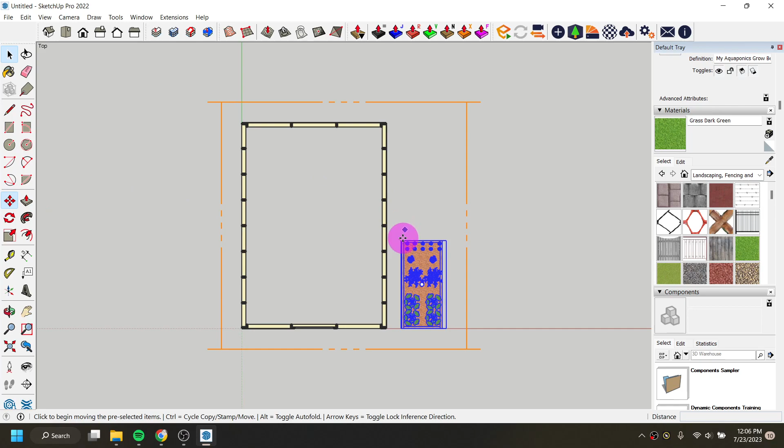The section cut is located right here. I'm going to do a section cut and keep it blue. I'll click once I have a blue plane, then use the move tool to move this up. All this is doing is cutting my roof off temporarily, so when I look at my object from above, it'll be easier to move this into place of where I want it to go. Hopefully I haven't moved it on a height, which it looks like I sure did.

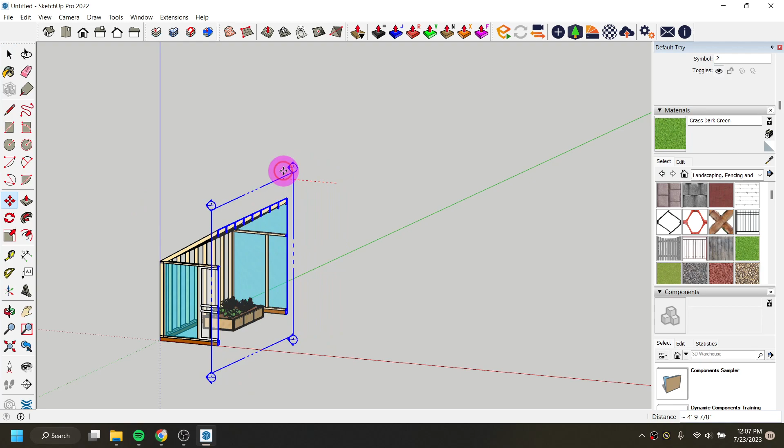We can also do section cuts because that still looks like it's floating to me. Now it's sitting underneath. You can do section cuts on horizontals as well. I just clicked on that cut and deleted it. I can do any other section plane. If I do it based on a red one, I'll be able to move this on a horizontal, so I can cut parts of the building away in that direction. As I'm trying to move things into place around my building, I can use that section cut as a helpful guide to make sure I've got stuff actually placed in there.

What would have been helpful to put that garden bed in the right spot would be if my floor or my ground was actually in line. So I looked at my object directly from the top, and let's draw our rectangle. And there we go, it's actually on my building. So that's good, I'll put my grass texture on it.

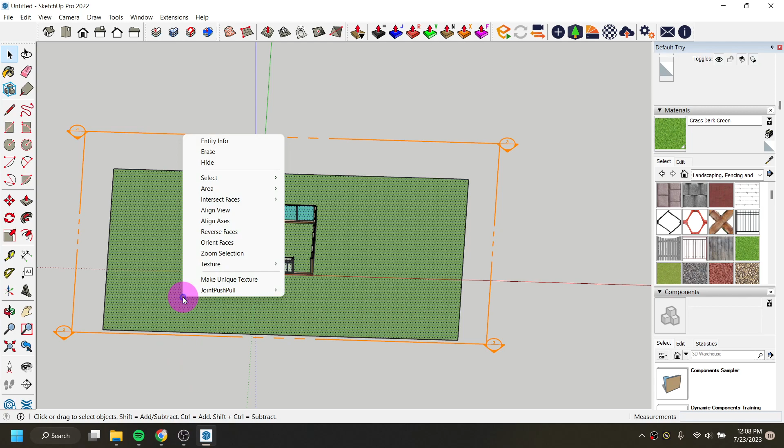Just because that's going to be something where when I go to place an object in, I'll do another section plane on my blue and use move to move it up. When I go to place objects in, they're going to kind of want to snap to things like the face of this. I'm also going to highlight it, well, I actually can't make that into a group. It's only just one face, but I should be okay.

So now let's try again, go into the warehouse. I'm going to pick a different vegetable bed than this guy, just because it did make my thing a little bit angry. Let's try this one, this 4x8. Let's see if that freezes my SketchUp. It's not responding, but it's not frozen yet. If I just wait, eventually it'll come in.

Part of it for me is my computer recording and trying to do these tasks at the same time.

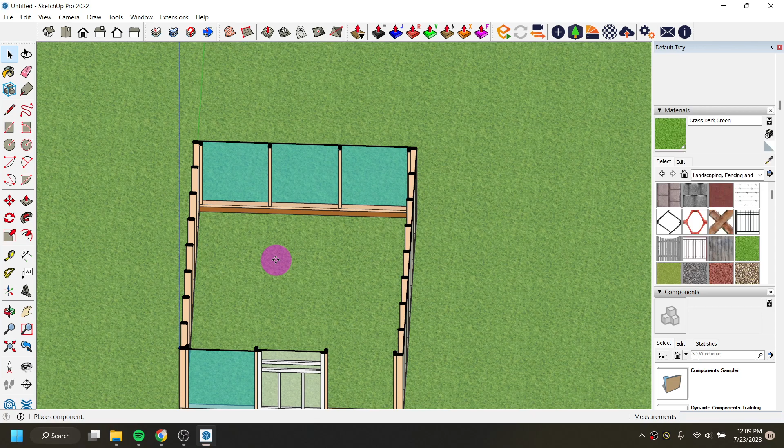But if I'm here, we go. So it brought it in as these two. Let's say I don't want both of these, let's say I just only wanted the one. I can hit the space bar, double click on it, and they have it as kind of these two different groups. So I could get rid of this group, get rid of those pieces of vegetation, and now I just only have the one.

And I could use the move tool to grab it by a point I know. Where do I want that point to sit? And because of the fact that I had that ground, it kind of stayed on the bottom. Then I can also look at it directly from the top to move it into place a little bit more, but now I've smashed it into the ground by moving it there.

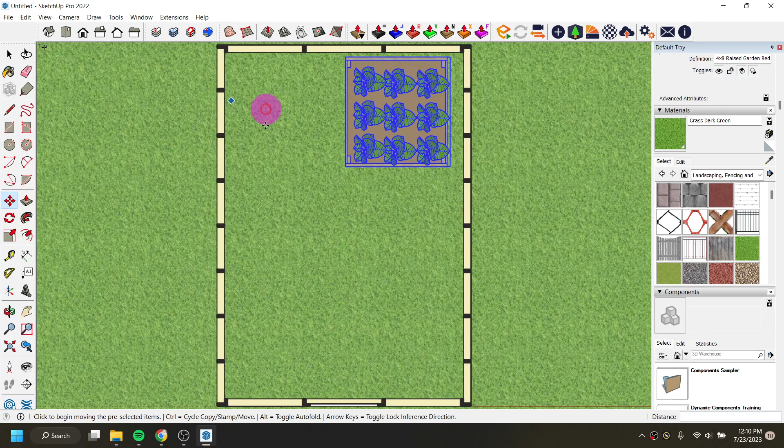So sometimes we gotta be a little careful when we go to move it. But since it's on that green axis, I know that I'm only moving just in the green. And since I'm on the red, I'm not moving anything related to height. So I can kind of move my different parts or pieces around.

So that's a very quick demonstration and explanation of this greenhouse and of this building. When you're all done, please make sure you have deleted these sections - just hit the space bar, click on the section, and hit delete. Make sure you also have all of your greenhouse covering on all of the sides. I know I didn't show that, but I'd prefer if you have it there on each one. And I'll see you in the next video.